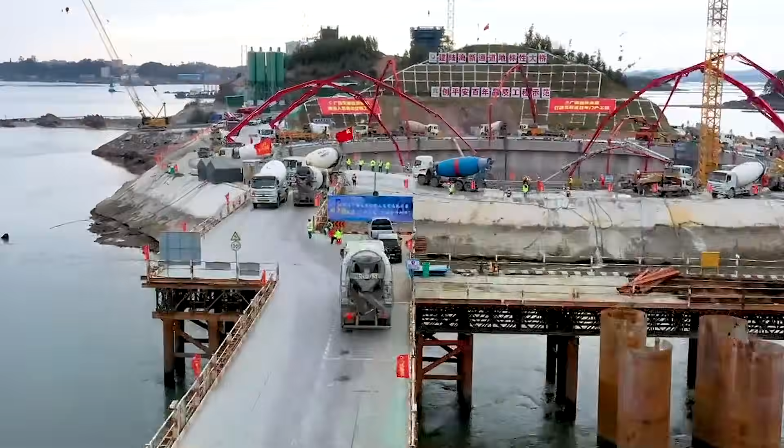Hey guys, did you know that China has earned the nickname Infrastructure Maniac? This nickname is not derogatory, it reflects foreigners' astonishment at the speed of China's development. In today's video, we will bring you mighty Chinese construction technology whose engineering shocks America's engineers to the bone.

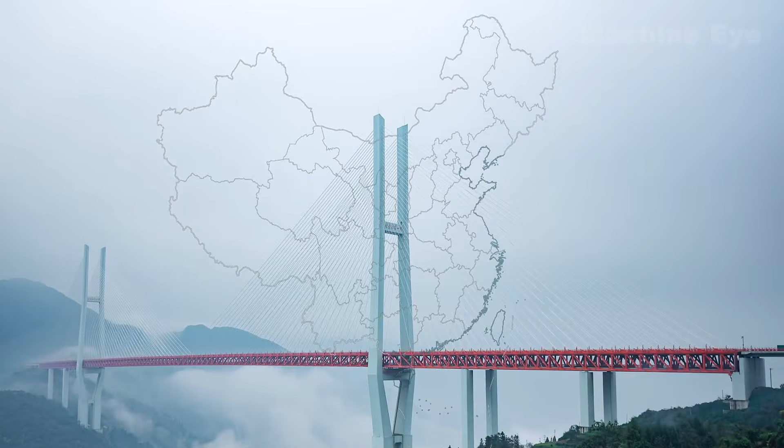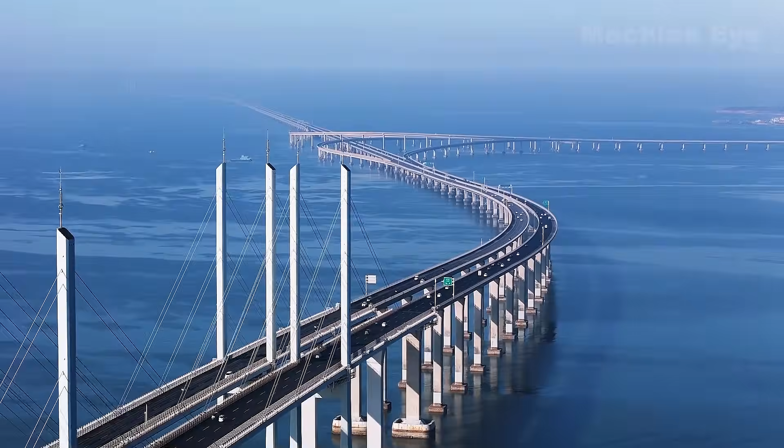On this planet, there exists a type of engineering marvel that inspires awe and pride in equal measure: bridges. In this realm, China is redefining the meaning of bridges with its technology, perseverance, and innovation. From cable-stayed bridges spanning deep mountain valleys to super projects crossing vast oceans, China, often called the infrastructure giant, has claimed the pinnacle of global bridge engineering. Today, let's explore just how incredible Chinese bridges are and uncover the secrets behind their creation.

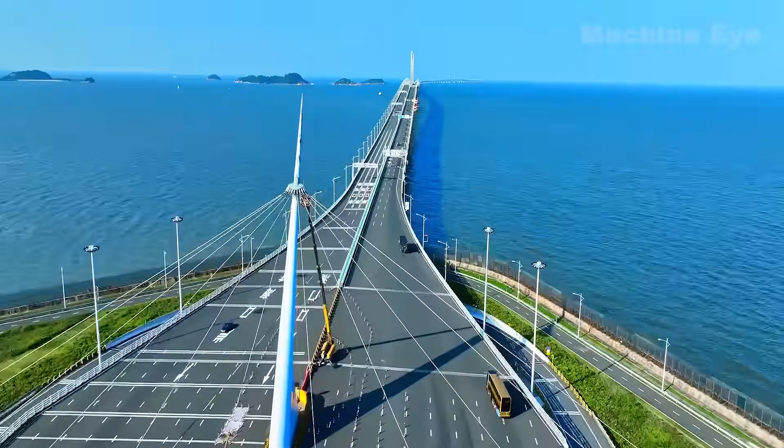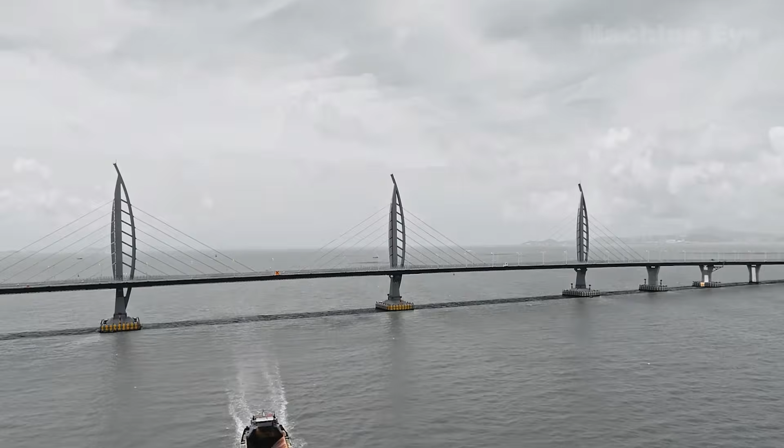Let's start with one of the most renowned bridges in the world, the Hong Kong-Zhuhai-Macau Bridge. As its name suggests, this bridge connects Hong Kong, Zhuhai, and Macau, spanning the Lingdingyang waters. It stretches 55 kilometers, making it the longest sea-crossing bridge in the world. However, it is more than just a bridge, it is a bridge-island tunnel combination project. To allow the bridge to cross busy shipping lanes, engineers constructed a 6.7-kilometer-long underwater immersed tunnel. Each segment of the tunnel weighs 80,000 tons, equivalent to the weight of an aircraft carrier.

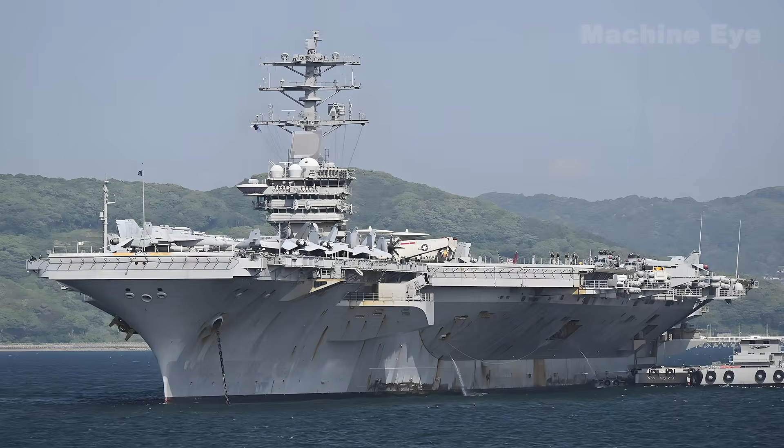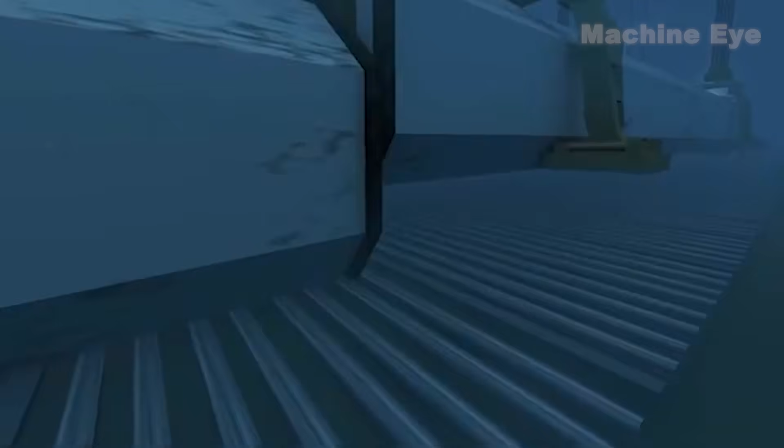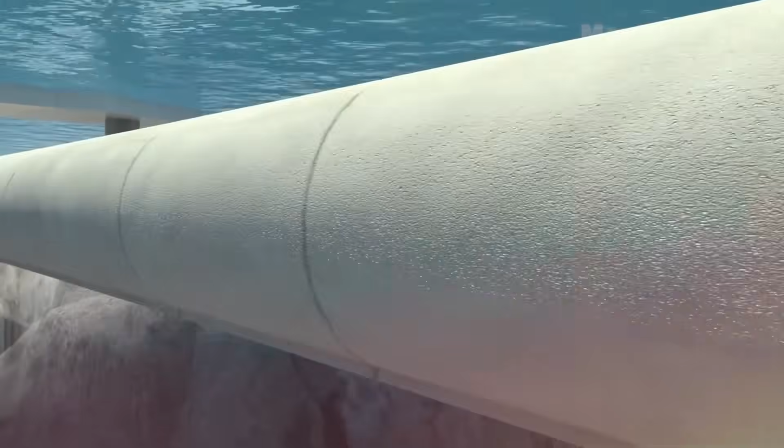How challenging is it to install an immersed tunnel? For instance, the alignment tolerance during the connection of each tunnel segment cannot exceed 2 centimeters. Yet in deep waters where currents, silt, and pressure are major challenges, achieving such precision seems nearly impossible. But Chinese engineers turn the impossible into reality with their cutting-edge expertise. After relentless efforts, a world-shocking underwater tunnel was successfully completed. This raises a question. With the sea filled with water, how did Chinese engineers manage to construct this underwater marvel? Let's dive deeper into the process.

There are 4 common methods for constructing underwater tunnels: the drill and blast method, which uses explosives, the TBM and shield tunneling methods, suitable for hard rock and soft soil respectively, and the immersed tube method, which involves lowering pre-made pipe sections onto the seabed and connecting them.

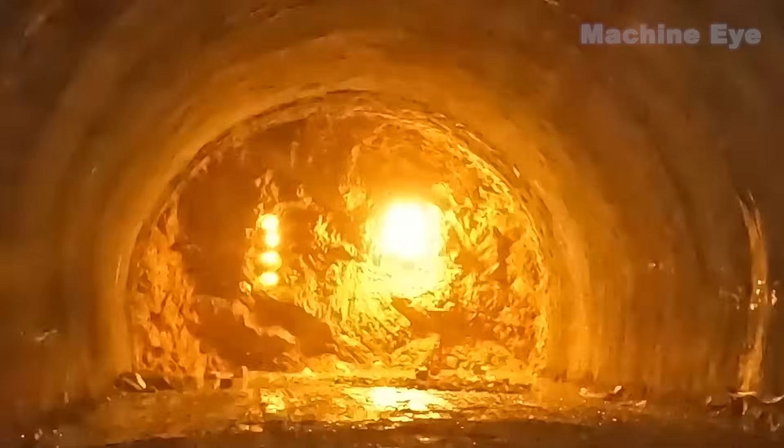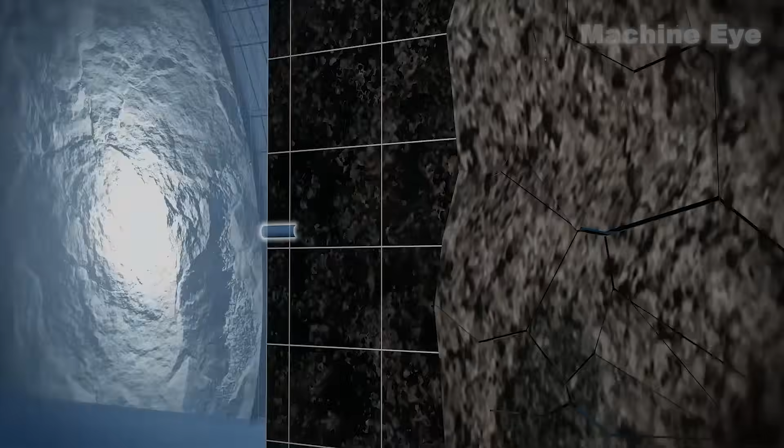The drill and blast method, also known as the mining method, involves using explosives to carve out a section, removing the rubble, and lining the tunnel walls. This cycle repeats until the tunnel is complete. Since blasting can disrupt surrounding rock layers, this method is often used in stable geological conditions. When fractures in rock formations cause water seepage, engineers must inject grout to create a watertight barrier for stability. China's first underwater tunnel, the Xiamen Tunnel, was built using this method.

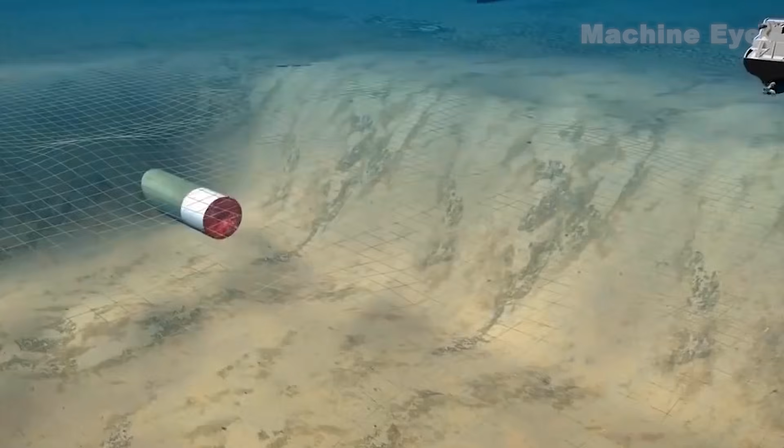TBM and shield tunneling methods involve large drilling machines. TBMs are used for hard rock environments, while shield machines excel in soft soil layers and feature waterproof capabilities. These machines simultaneously excavate and assemble concrete segments to support surrounding rock, preventing tunnel collapses. The shield tunneling method is particularly versatile due to its full mechanization.

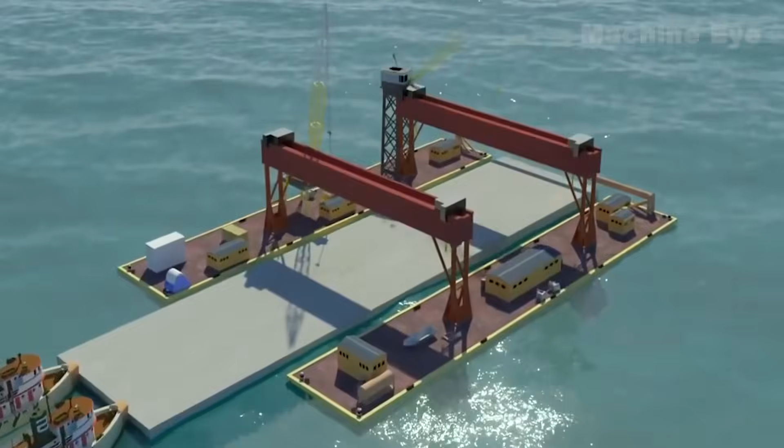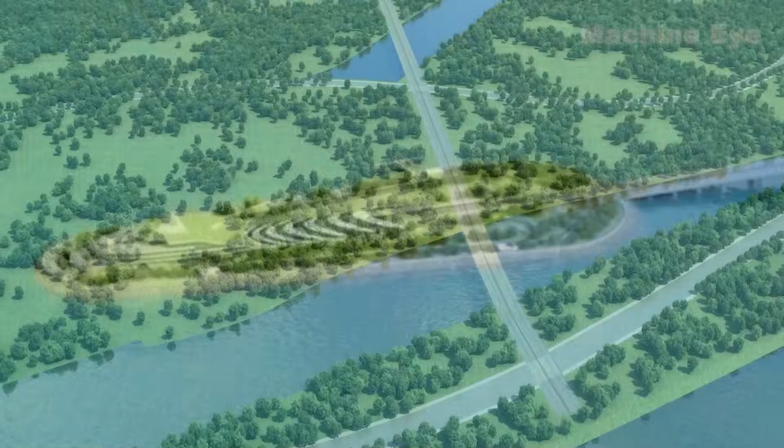Lastly, the immersed tube method involves submerging prefabricated tunnel segments and connecting them underwater. Waterproofing the connections is critical. The Hong Kong-Zhuhai-Macau Bridge's tunnel was built using this method. Constructing an immersed tunnel is a complex and precise process, akin to crafting a masterpiece.

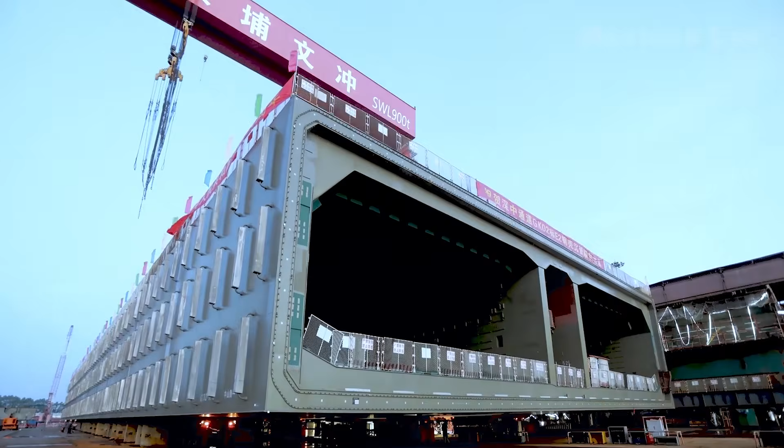The first step is building a dry dock, similar to a shipyard. Engineers excavate a massive rectangular water tank near the tunnel site and use techniques like slope excavation and diaphragm walls to ensure a level base and watertight conditions. This creates a solid foundation for fabricating the tunnel segments.

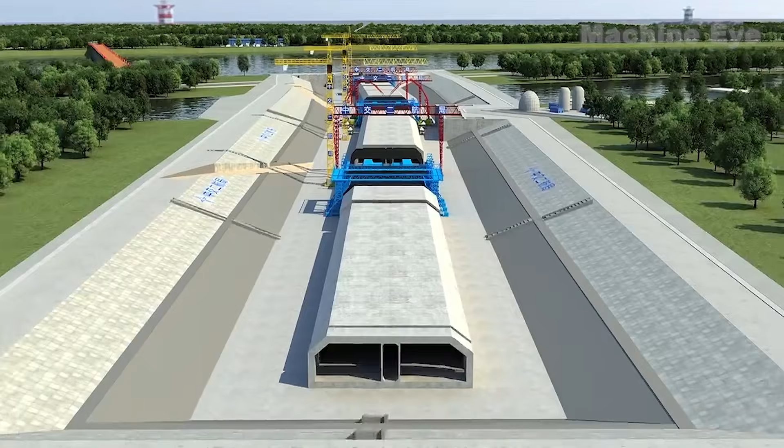Within the dry dock, steel reinforcement cages form the skeleton of the tunnel segments. Concrete is then poured into molds to create the segment walls. After curing, engineers maintain optimal concrete quality using ultrasonic mist cooling internally and geotextile and blankets externally for moisture retention.

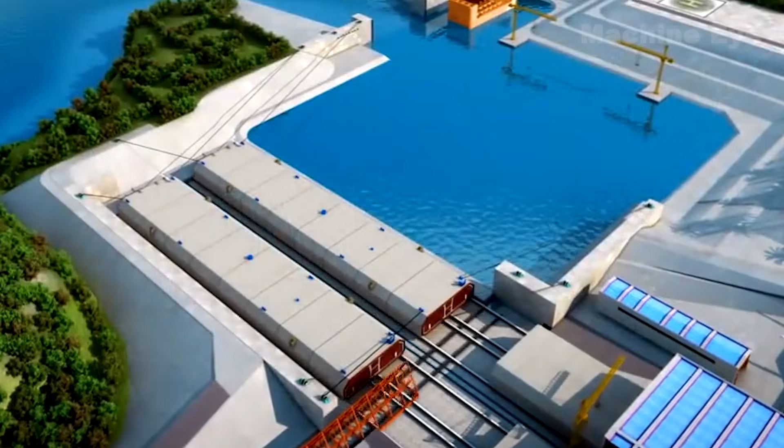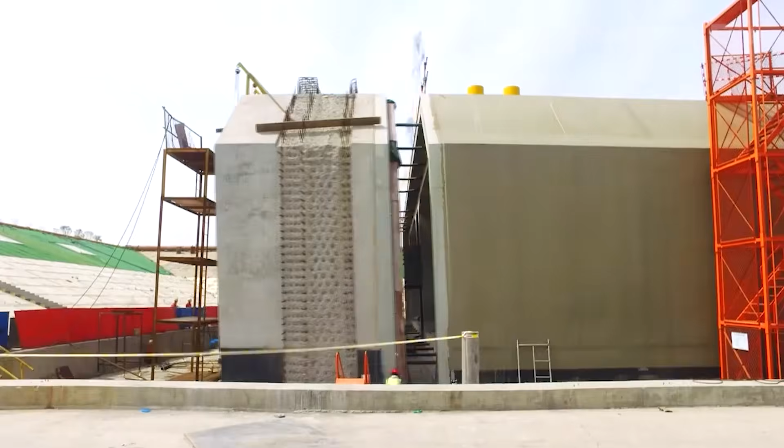Outfitting the tunnel segments is a critical phase, including installing ballast water systems, pipelines, and monitoring systems. The segment's exterior surfaces are coated with polyurethane to ensure waterproofing. The ends of the segments, crucial for connection, are equipped with steel bulkheads, waterproof gaskets, and sealed doors to maintain integrity during installation. Once outfitting is complete, the dry dock is flooded, and the segments undergo rigorous testing to ensure their readiness for transport and installation.

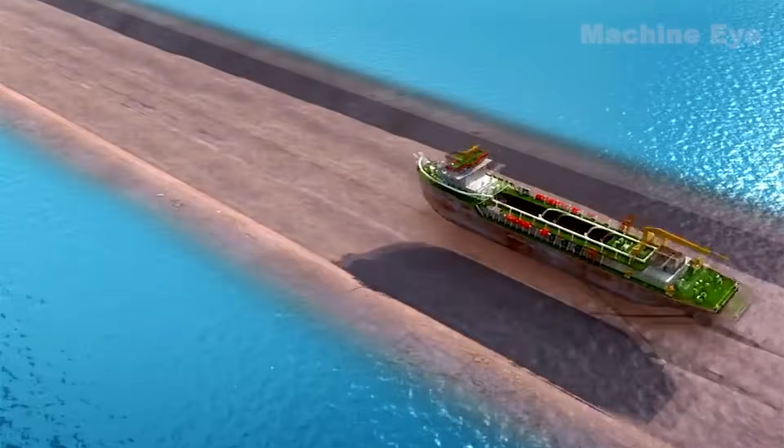The foundation trench for the immersed tunnel must be meticulously excavated. Large dredgers handle rough excavation, smaller dredgers perform precision digging, and leveling vessels finalize the surface. The riverbed's flatness error must not exceed 4 centimeters to enable precise placement of the segments.

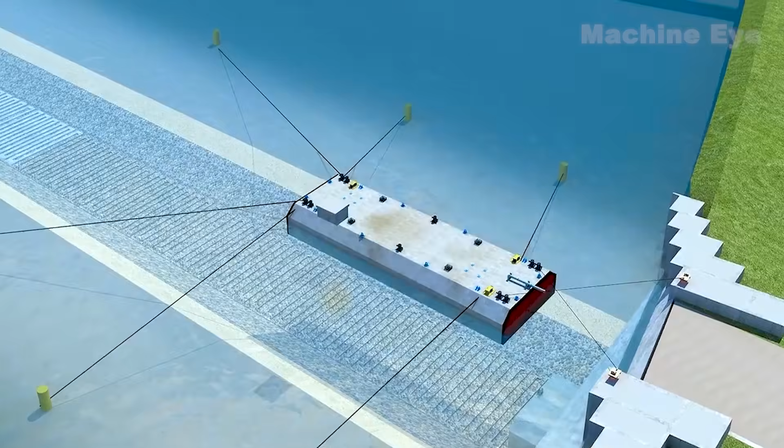Next comes the most exciting phase, segment transport and installation. Tugboats and anchor cables position the segments at the designated location, guided by Beidou navigation and digital monitoring systems for millimeter-level accuracy. During installation, engineers flood the segments to gently lower them into the trench and align them for connection. This phase demands exceptional technical expertise and teamwork.

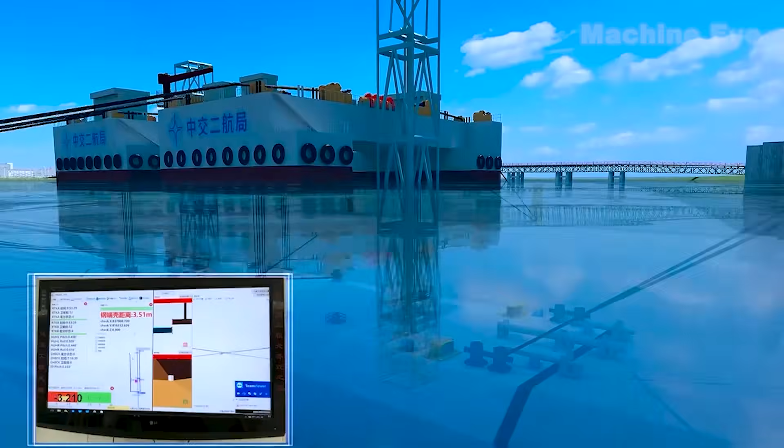After installation, the segments are reinforced with gravel backfill, geotextiles, and anti-scour stone cages to ensure structural safety and long-term stability. Finally, the interior of the tunnel is equipped with electrical systems, fire prevention setups, and decorative finishes. High-quality roadways are laid to ensure the tunnel meets transportation and safety standards.

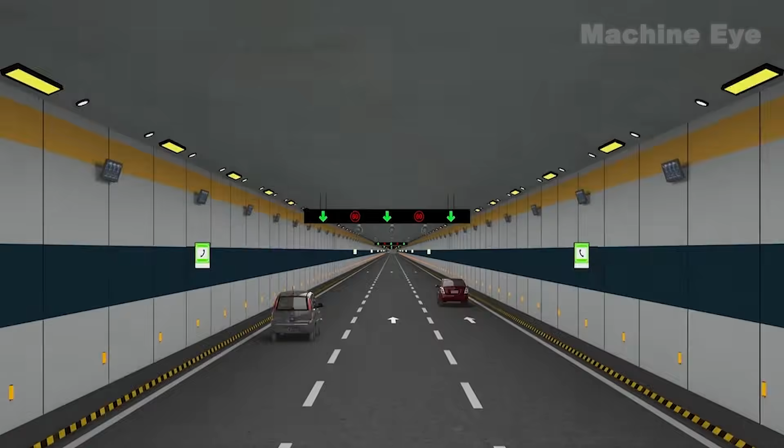From dry dock construction to segment alignment, every step of the immersed tunnel's creation exemplifies engineering precision. The Hong Kong-Zhuhai-Macau Bridge's tunnel not only conquered nature's barriers but also showcased Chinese engineers' ability to push the boundaries of innovation.

Now, let's travel to southwestern China to visit the Beipanjiang Bridge, a ladder to the heavens suspended in the clouds. The bridge stretches 1,341 meters in length and soars 565 meters above the valley floor, making it one of the world's highest bridges. Standing on it feels like the entire world lies beneath your feet.

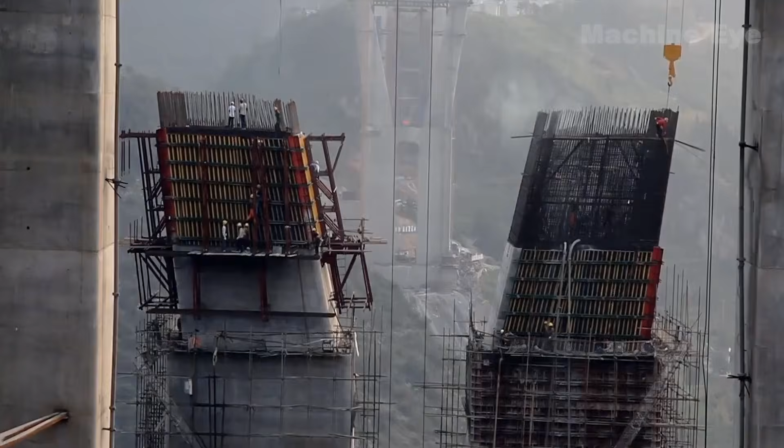During construction, workers had to anchor foundations into steep cliffs and erect the structure layer by layer. Battling fierce winds and thick fog, they overcame life-threatening challenges to turn an insurmountable chasm into a vital connection.

When China announced its plan to invest 1 billion yuan in the construction of the Beipan River Bridge, American experts predicted it would take China 300 years to complete this monumental project. To everyone's amazement, Chinese engineers defied expectations and completed the colossal undertaking at an unimaginable speed, leaving the once mocking American experts silenced.

Oh God, please, no! No!

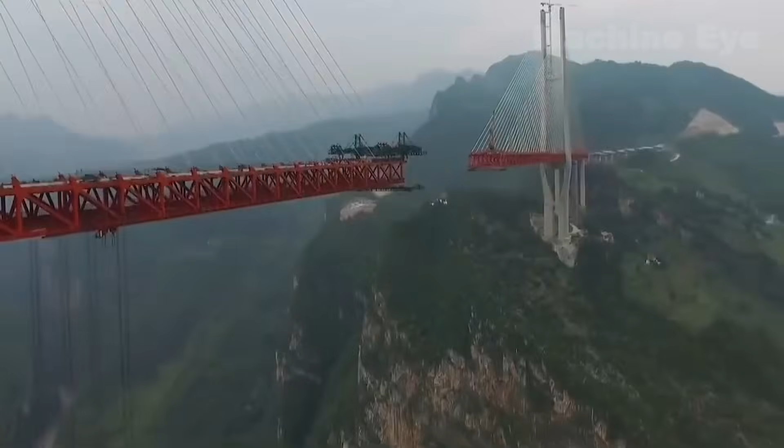In reality, it took only 3 years for China to successfully finish the Beipan River Bridge. One can only wonder how long it might have taken if the project were undertaken by the United States.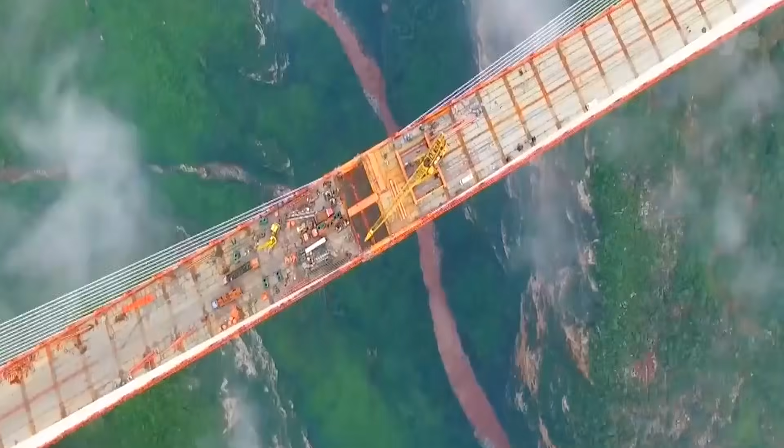The rugged terrain and extremely poor transportation conditions in the Guizhou region had a profound negative impact on the local population's economic development. Therefore, in 2013, China decided to construct a world record-breaking bridge at the intersection of Yunnan and Guizhou provinces to completely transform Guizhou's harsh transportation environment. However, this plan faced mockery from Western bridge expert Smith.

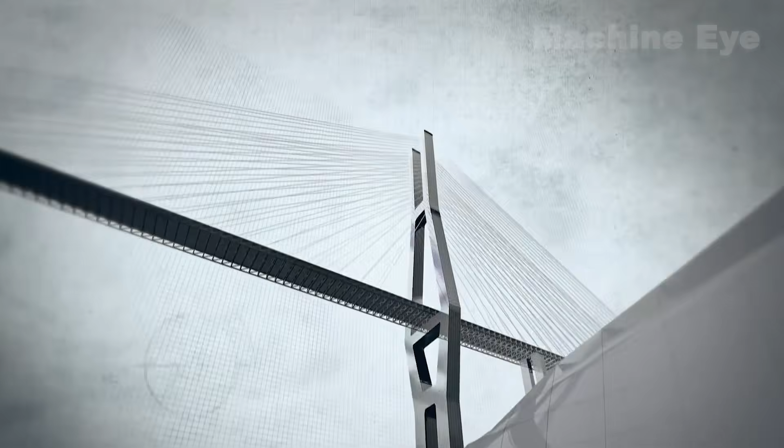With a height of 565 meters, equivalent to 200 floors, surpassing even the tallest U.S. structure, the World Trade Center at 412 meters, foreign media rushed to report on the seemingly impossible project. Smith, after inspecting the Beipanjiang Grand Canyon, asserted that even with American technology, it would take 300 years to complete, suggesting China would need at least 3,000 years.

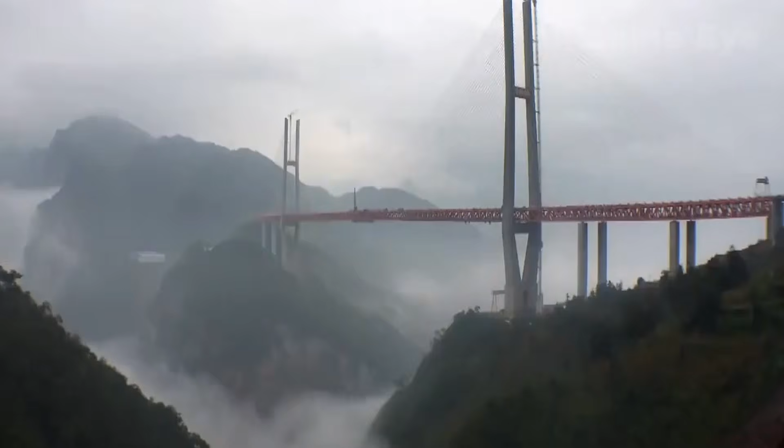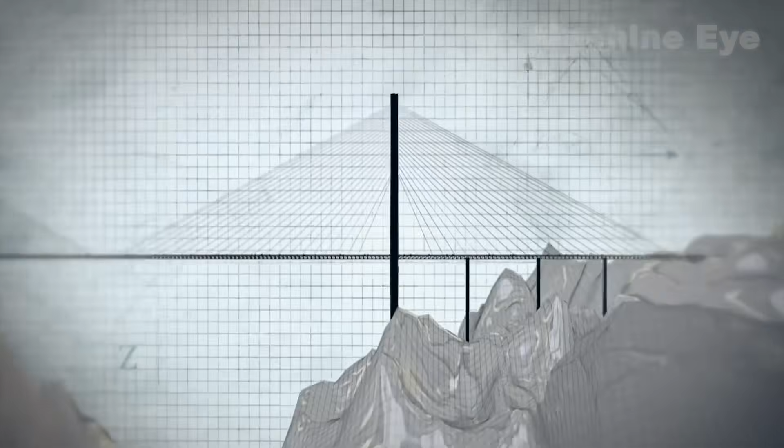Despite the ridicule, Chinese engineers courageously faced the challenge, determined to make Beipanjiang the world's highest bridge. The engineering team was undeterred by external mockery and dedicated themselves wholeheartedly to the construction. Situated in a canyon with a main bridge length of 1,341 meters, traditional bridge pier construction in the canyon was impossible. Considering wind risks, the construction team opted for cable-stayed bridge technology.

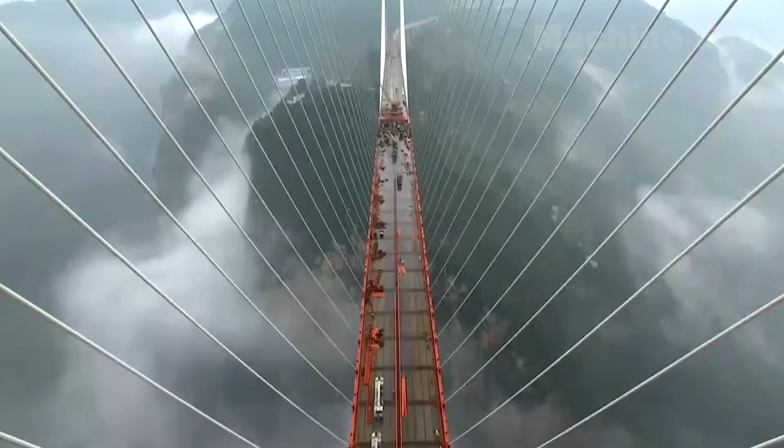During construction, Chinese engineers innovatively employed longitudinal movement and hanging assembly techniques for the first time, lifting and assembling the 12-meter, approximately 160-ton steel trusses in midair. Precision alignment of 27 mm diameter bolts was essential. Despite the fierce canyon winds, Chinese engineers overcame every challenge, demonstrating their ability to tackle any obstacle.

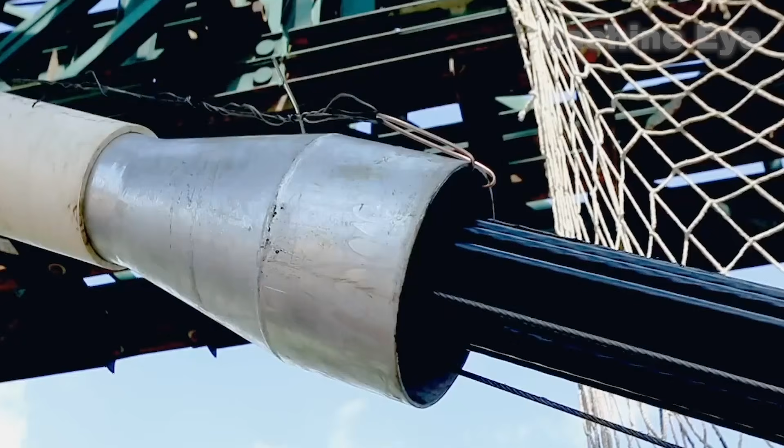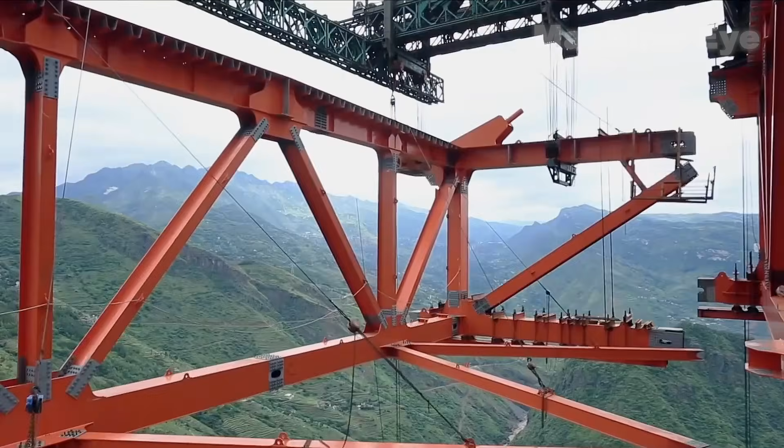To address challenges like impassable rivers for traditional ship transport of cut-off beams, engineers adopted new methods. Beams were disassembled into smaller pieces, transported to the site by trucks, and assembled like building blocks, accelerating the installation process, shortening the construction period, and reducing damage to the bridge piers.

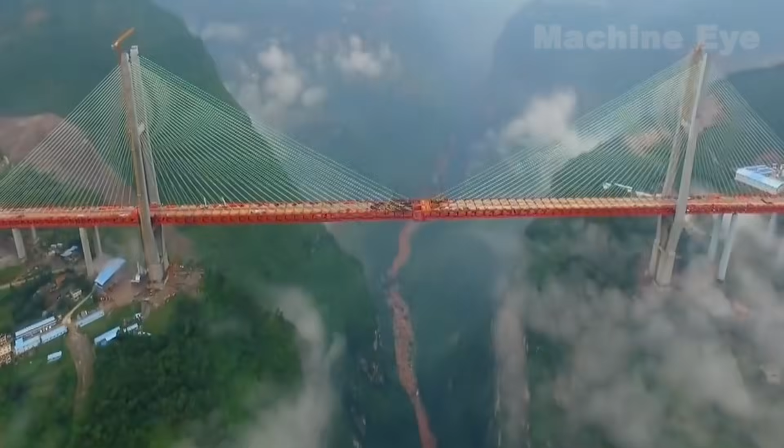Additionally, for the steel cables lifting the bridge deck, China's engineering team used one of the strongest materials with a tensile strength exceeding 1860 MPa and a dynamic load yield strength reaching 250 MPa. This material greatly ensured the stability of the bridge under strong winds and water vapor erosion, guaranteeing the project's safety.

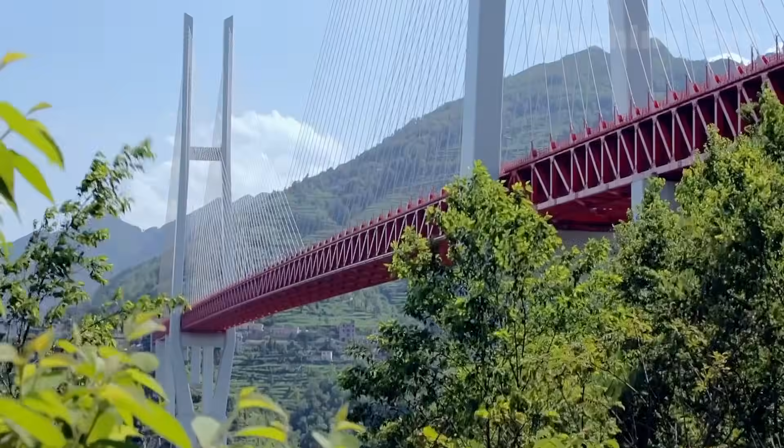Between two iconic towers, it stretches over a mile-long deck. Supported by 250-foot steel cables, it carries an incredible 22,000 tons of weight. This bridge can arguably be deemed the most colossal bridge structure on this planet.

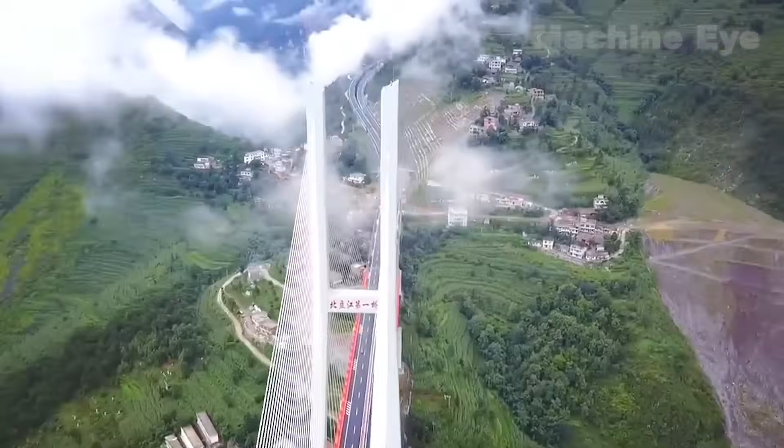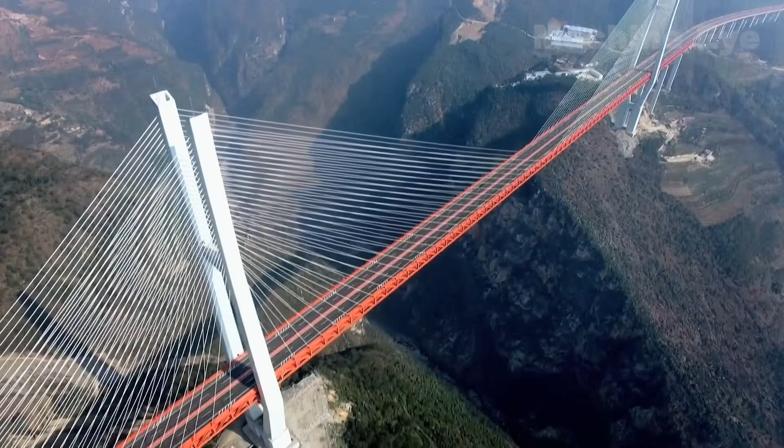Through this project, China not only showcased its strength, providing effective support for poverty alleviation projects in Guizhou and Yunnan, but also defeated foreign experts who once mocked China. In fact, even the United States, with its arrogant statements about China, couldn't guarantee the completion of the Beipanjiang River Bridge. This bridge stands as a milestone in China's infrastructure development, serving as an irreplaceable transportation hub.

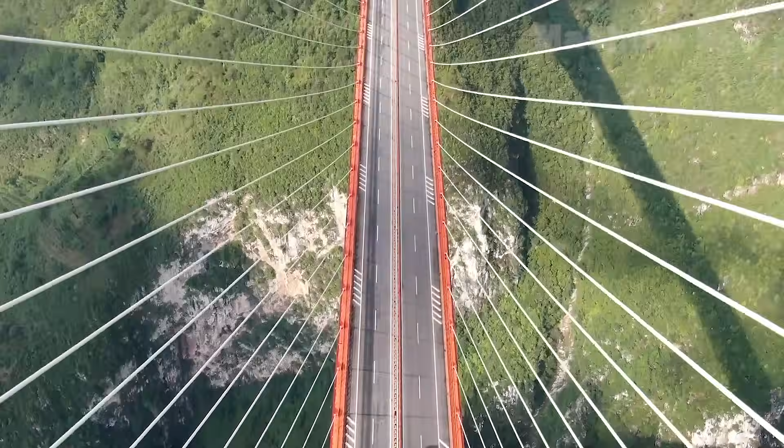In 2016, with a cost of 1 billion yuan and a construction time of 3 years, the Beipanjiang River Bridge, standing at a height of 565.4 meters, successfully set a new Guinness World Record. China's achievement completely contradicted the initial mockery from the famous American bridge expert Smith, who claimed it would take at least 3,000 years to complete.

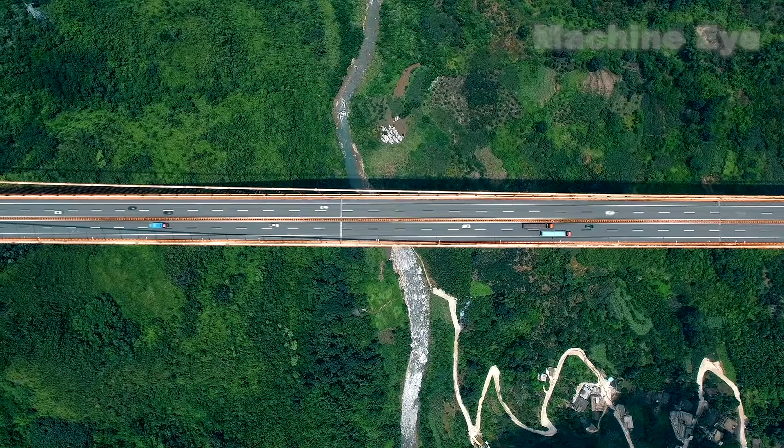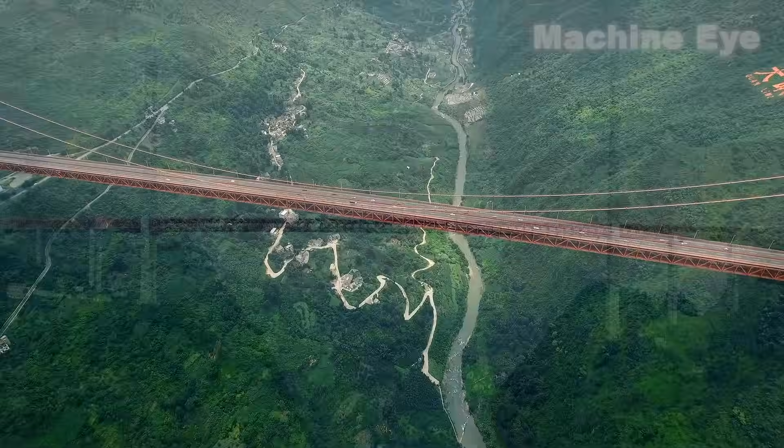Located in the central part of the Yunnan-Guizhou Plateau, overcoming steep terrain and complex geology, the Beipanjiang River Bridge has shortened the travel time between Yunnan and Guizhou to just 1 hour, bringing new hope to this land and becoming a source of pride in China's bridge construction. The completion of the Beipanjiang River Bridge signifies another miracle in the history of global engineering.

Additionally, the Hangzhou Bay Bridge, the world's third longest sea bridge, links Ningbo and Shanghai, spanning 36 kilometers. Built in a region notorious for its treacherous tidal conditions, the bridge overcame what was once considered a no-go zone for construction. It has since cut travel time between the two cities and spurred economic growth in the Yangtze River Delta region.

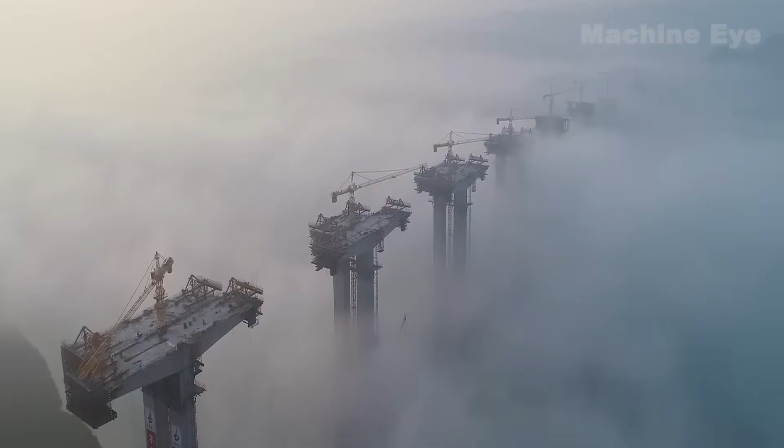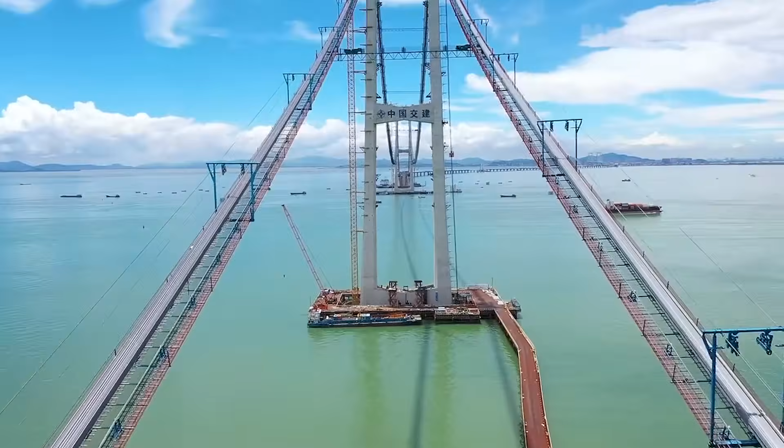China's dominance in bridge engineering stems from its advanced technology. For instance, China's steel structures are world-class. The Hong Kong-Zhuhai-Macau Bridge alone used over 420,000 tons of steel, enough to build 60 Eiffel Towers. This steel is not only incredibly strong but also resistant to marine corrosion, ensuring a lifespan of 120 years.

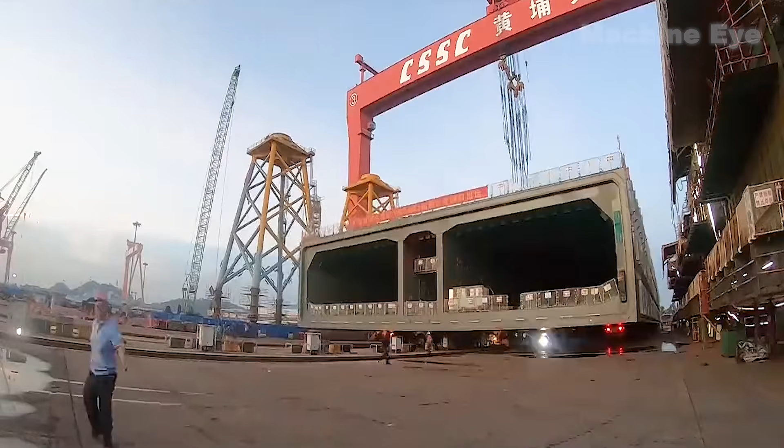China has also established a fully integrated bridge construction industry, from design to manufacturing. During the construction of the Hong Kong-Zhuhai-Macau Bridge, all lifting equipment, transport vessels, and prefabricated components were made in China. This self-reliance reduced costs and significantly boosted efficiency.

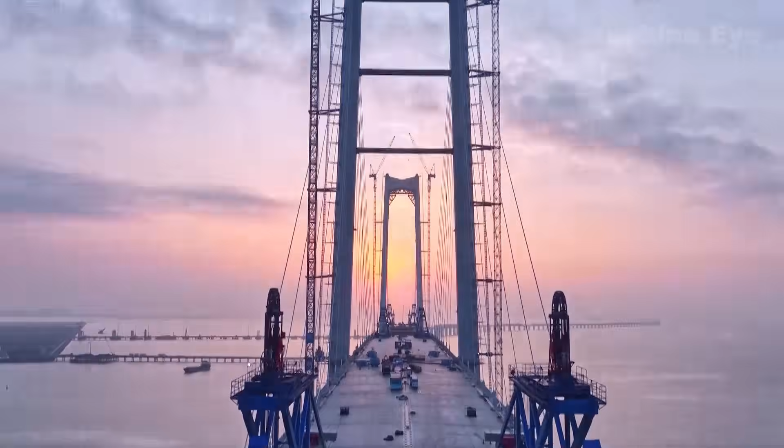China's diverse terrain, including plateaus, mountains, plains, and seas, serves as a stage for engineers to innovate. From the Loess Plateau to the Tibetan Plateau, and from the Pearl River Delta to the Bohai Bay, each bridge is a testament to ingenuity tailored to local conditions. The significance of bridges goes beyond connecting two sides.

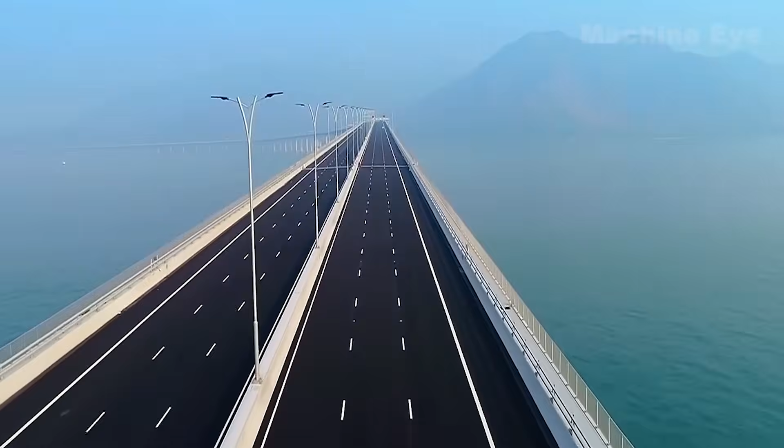They reshape transportation networks. The Hong Kong-Zhuhai-Macau Bridge reduced travel time between Hong Kong and Zhuhai from 3 hours to 30 minutes, strengthening regional ties and injecting new vitality into the Pearl River Delta's economy. Bridges also transform entire regions. For example, Guangxi's Pingnan Third Bridge, one of the world's largest arch bridges, has improved travel for local residents while boosting tourism and logistics industries.

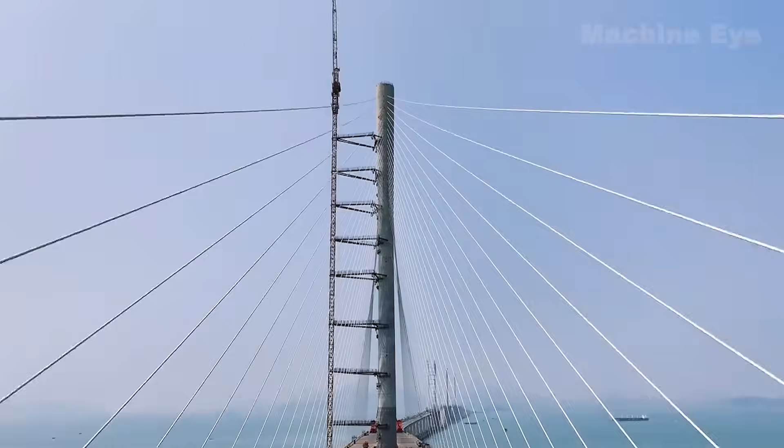China's bridge-building prowess is making waves internationally. The Padma Bridge in Bangladesh, built with Chinese expertise, is hailed as a lifeline for South Asia's economy, solidifying China's reputation in global infrastructure. Looking ahead, China plans to construct more deep-sea bridges, connecting distant islands to the mainland. This not only presents technological challenges but also reflects a vision for global connectivity.

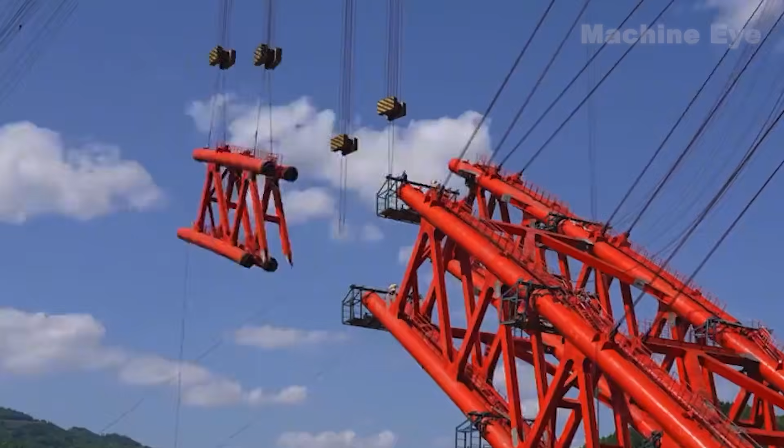Artificial intelligence and IoT technologies are also being integrated into bridge construction. Future bridges may feature smart monitoring systems to detect issues early, optimize traffic flow, and enhance efficiency. Can you imagine driving from China to Europe one day? While it sounds like science fiction, advances in technology may turn transoceanic or transcontinental bridges into reality.

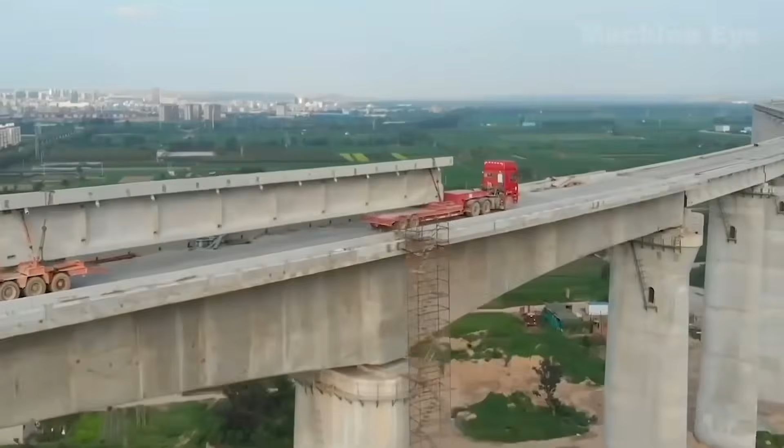Each bridge is a dialogue between humanity and nature. China's bridges are not just feats of engineering, they symbolize the intelligence and determination of the Chinese people. When you stand on these bridges, they connect more than just two shores. They connect us to the future. Chinese bridges are telling the world, China doesn't just build bridges, it uses them to connect the entire world.

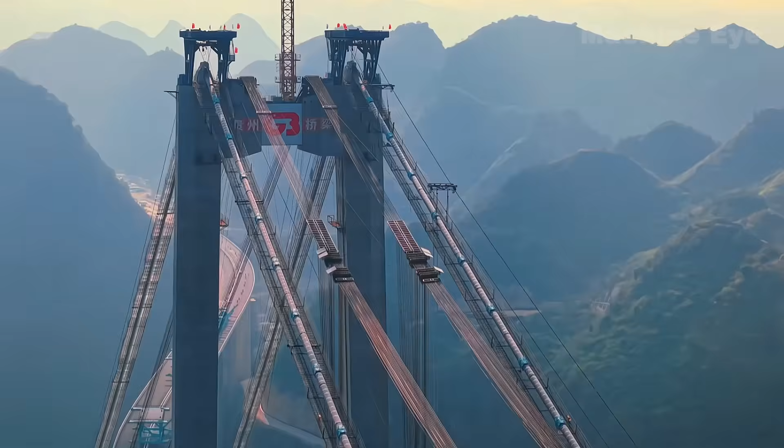China is the land of bridges, the birthplace of countless iconic structures. As Mr. Mao Yisheng once said, bridges are a reflection of a nation's culture. Today, China's bridge construction capabilities rank among the world's best, with an average of 20,000 new bridges built each year. These achievements are significant not only in terms of technological innovation and engineering expertise, but also in driving regional economic growth. China's bridges, proudly made in China, are a testament to its engineering prowess, inspiring awe and excitement.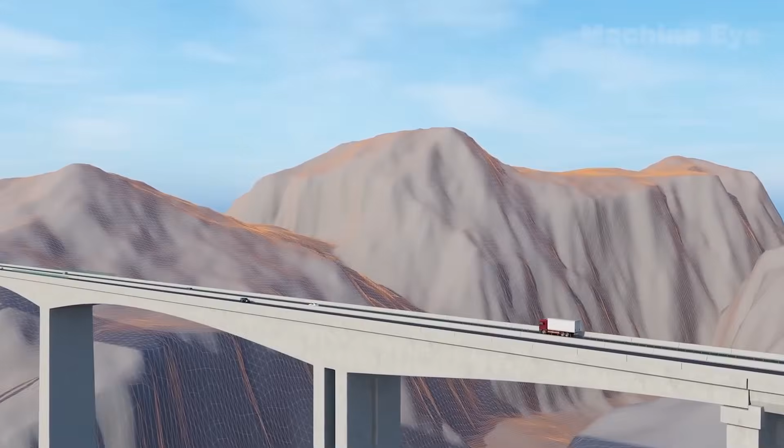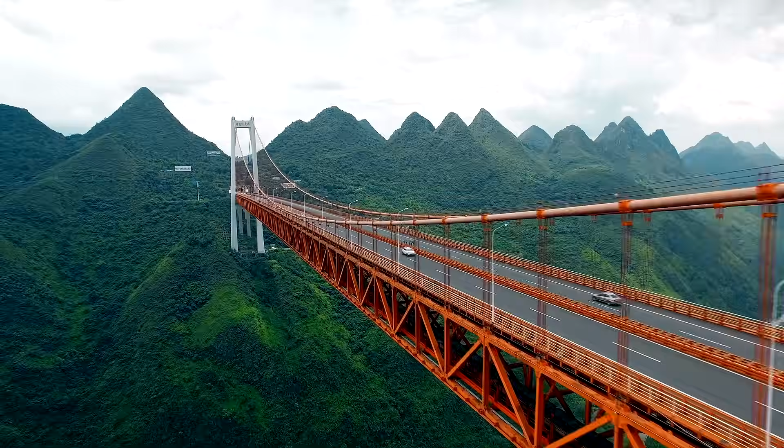Advances in new structures, materials, equipment, and technologies, especially their application in long-span bridges, have propelled China's bridge-building capabilities to world-leading levels. Notably, numerous long-span, heavy-load, and high-speed bridges have been completed, greatly enhancing China's status in global bridge construction history. According to incomplete statistics, 6 of the world's top 10 longest-span suspension bridges are located in China.

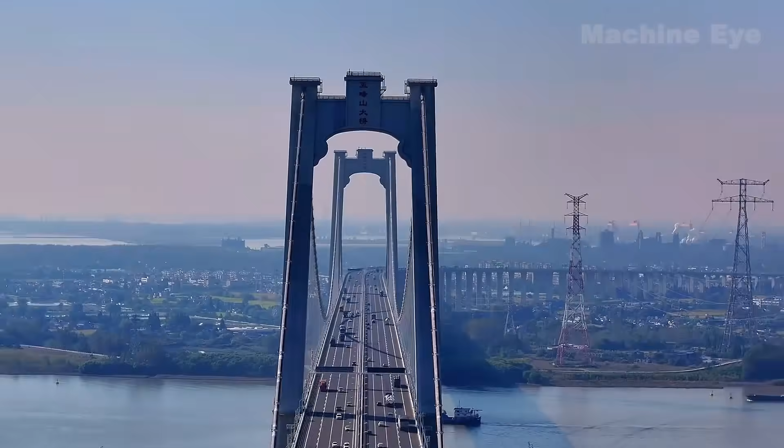Among them, the Wufeng Mountain Yangtze River Bridge stands as a milestone, a kilometer-scale dual-use suspension bridge for both rail and road traffic. Its completion marks China's pioneering use of suspension bridge designs in high-speed railway construction, solidifying the nation's leading position in large-span bridge-building technology. The Wufeng Mountain Yangtze River Bridge, as the world's first high-speed railway suspension bridge, sets an example for future projects. The Chinese standards it established are undeniably of global significance.

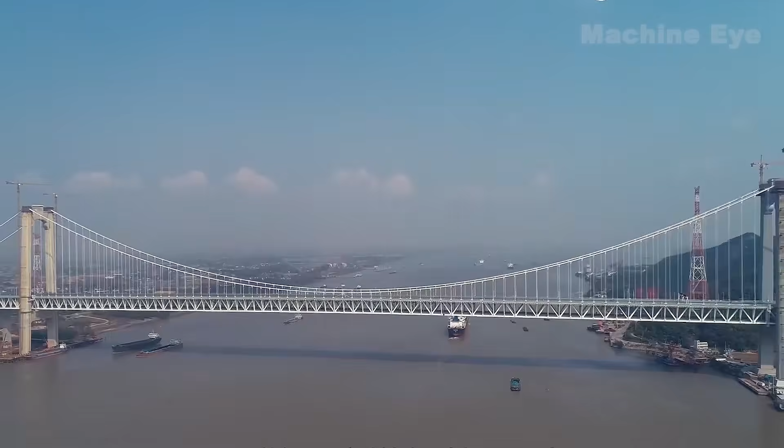It has brought China's high-speed rail into the suspension bridge era. More importantly, it ensures that the name China is the first to appear in the records of high-speed railway suspension bridges worldwide. The world remains the same, but China is no longer the same China. With the infrastructure powerhouse taking on the heavy responsibility and historical mission, it will continue to push forward, innovate, and drive China's giant ship steadily toward a promising future.

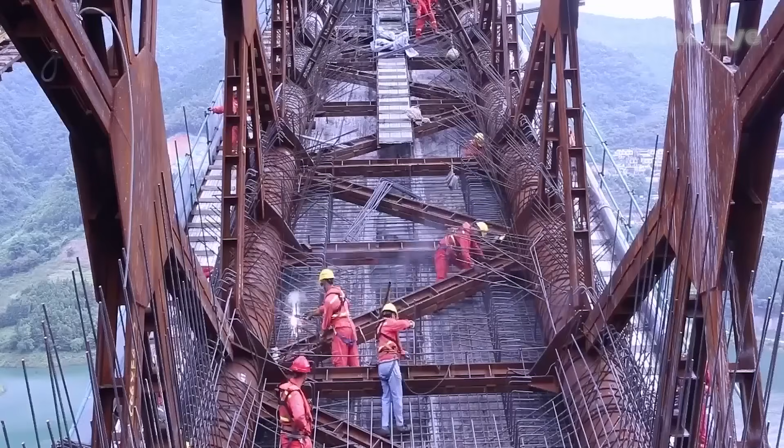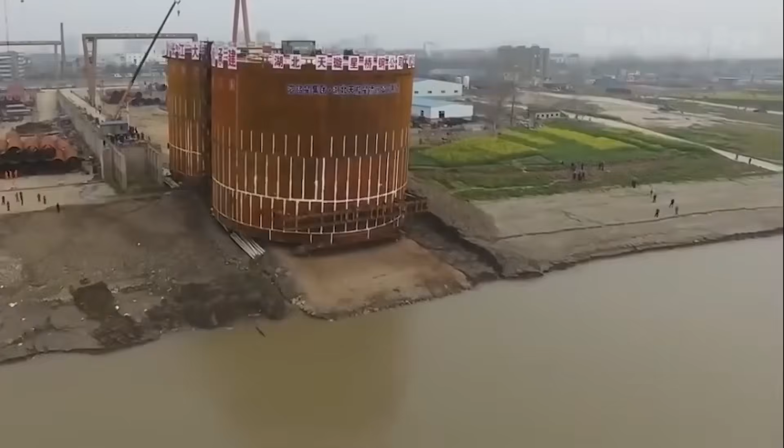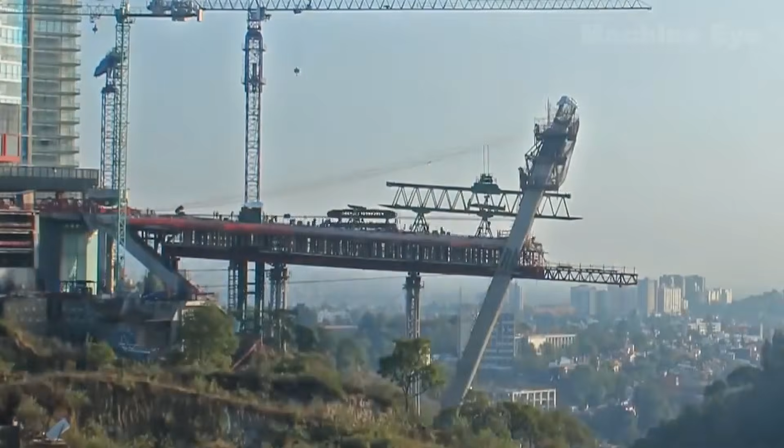China, a nation of resilience and determination, its hard-working people embody the essence of perseverance and dedication. Despite facing numerous challenges and enduring profound pain, they never cease to strive for greatness. China's indomitable spirit is a testament to its unwavering commitment to excellence. In times of adversity, China's deep understanding of humanity shines bright. Their profound philosophical insights encapsulate the essence of compassion, empathy, and unity. China's philosophy of life is a boundless source of wisdom, guiding individuals toward a deeper understanding of the human experience.

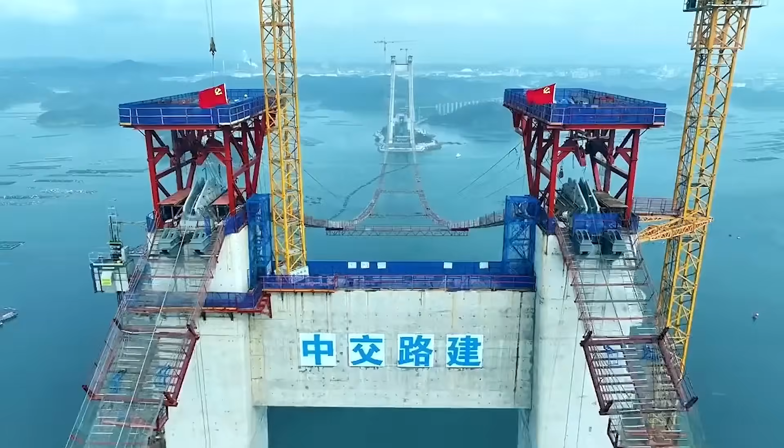With its rich history and cultural heritage, China has left an indelible mark on the world. The achievements of its people and their relentless pursuit of progress inspire admiration and awe. Their unwavering determination to make China the best resonates with the hearts of millions. China's contributions to humanity are truly remarkable. From revolutionary advancements in technology and science to promoting peace and harmony in a rapidly changing world, China has proven to be a guiding light for humankind.

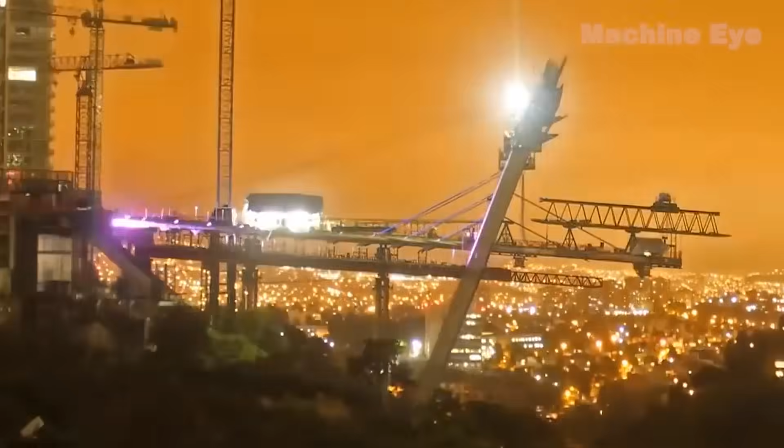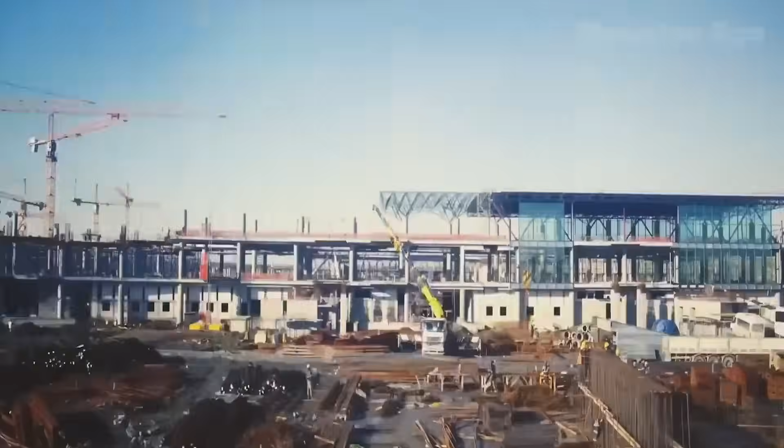Let us celebrate China, a nation that continues to grow and prosper against all odds. Let us cherish its commitment to humanity and tireless efforts to uplift both the nation and the world. China's unwavering spirit and deep understanding of humanity elevate it to a position of admiration and respect. May China continue to shine bright, leading the way toward a better and more compassionate future for all. The journey through China's mega projects is one of awe and inspiration, a testament to human ingenuity, innovation, and the relentless pursuit of progress. Each of China's major projects showcases the remarkable feats that can be achieved when vision, technology, and sheer determination come together.